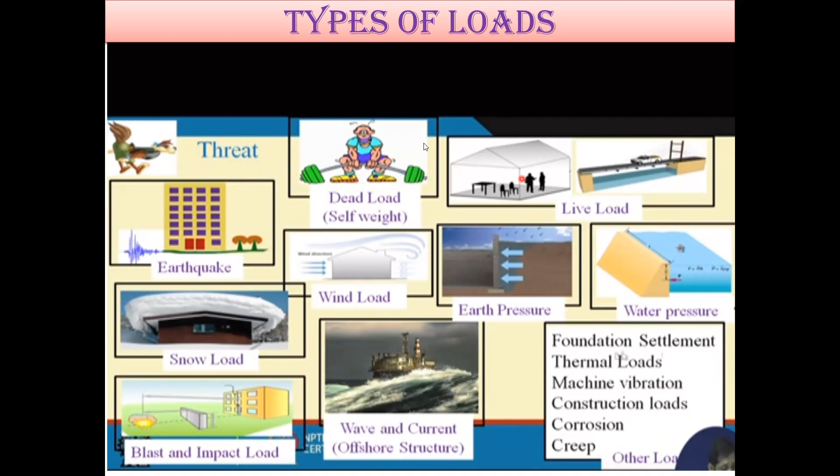So these are different kinds of load that act. One, we have a dead load, we have a live load, we have a wind load, we have earthquake load, we have snow load, then we have blast or impact load, for offshore structures we have wave and current load, and then we have water pressure if you're constructing a dam and all. So right now we are constructing a small residential building, so we'll be considering only the dead load and the live load.

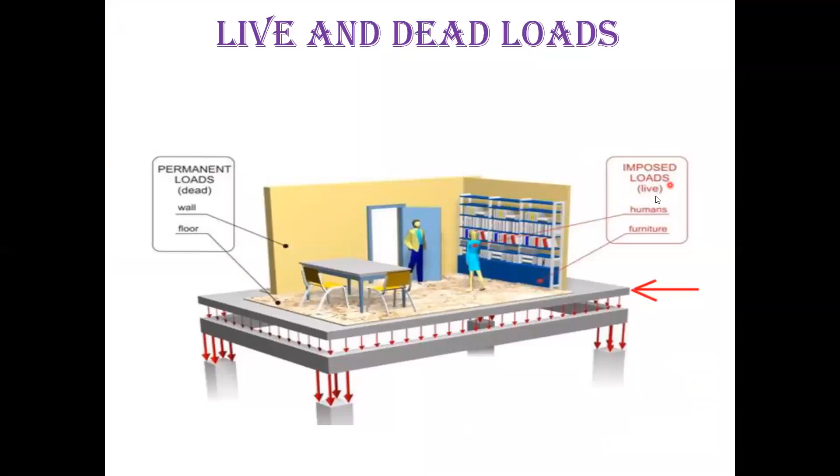So we human beings are called live load. Live loads are also called imposed loads. And the wall, the beam, the slab, they are all called dead load because they're permanent. They're not going to move here and there, right? The wall, the floor and all. But we human beings, the furniture, we are all live load. So that is why we call ourselves an imposed load, right? So with this understanding, I'll try to move ahead.

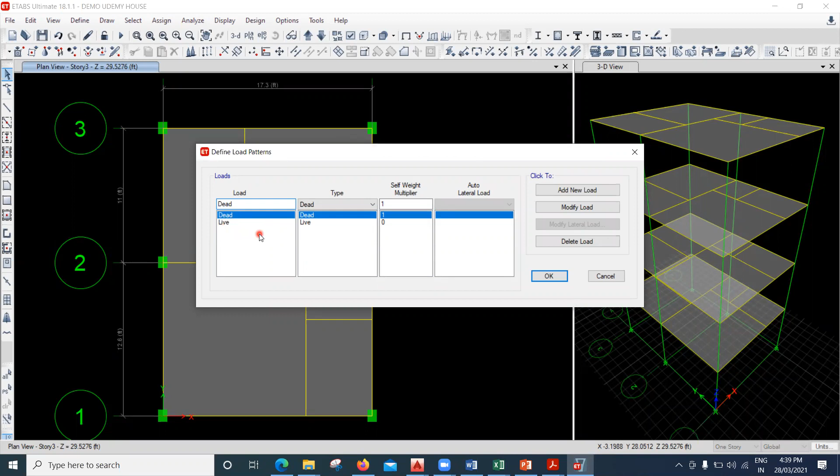Now, how do we calculate the load? Whenever we want to calculate the load, first we need to define the load. So I'll go to the option called define, and there's an option called load patterns. By default, ETABS is going to consider two loads, that is dead load and live load. That is enough for us. But actually, let us say this is a slab I have. Over the slab, I'm going to put my tiles and all, right? I'll show the image for that.

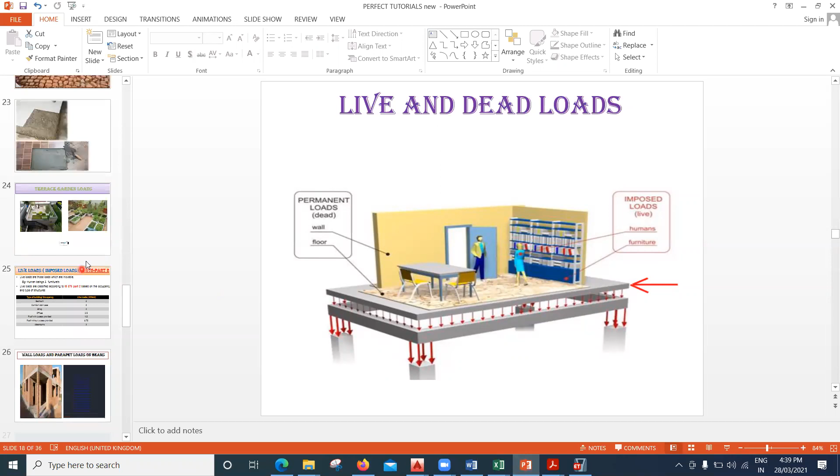Yeah, you can see it here. This is a floor I have. Over the floor, I'm going to put the cement mortar, and over that I'm going to lay the tiles. So this will also add weight on my floor, right? So this load I'm going to apply is called SIDL load, that is superimposed dead load. Over the floor you are applying this load, that is called superimposed dead load. So we need to calculate how much load is coming. I'll tell you how to calculate that load.

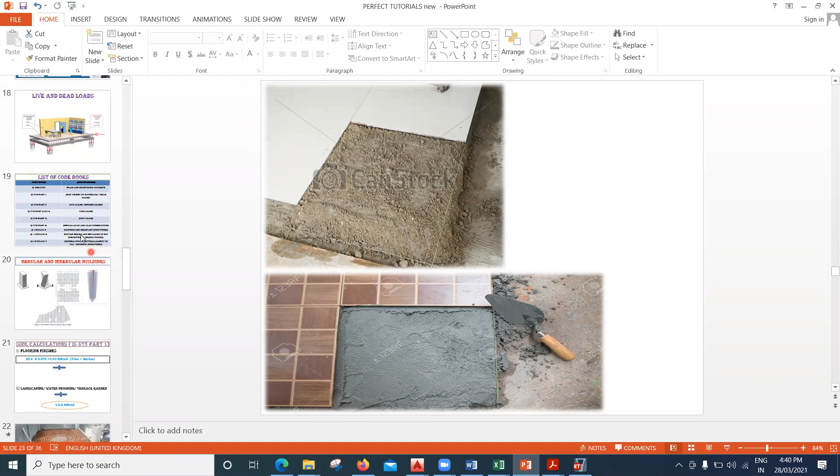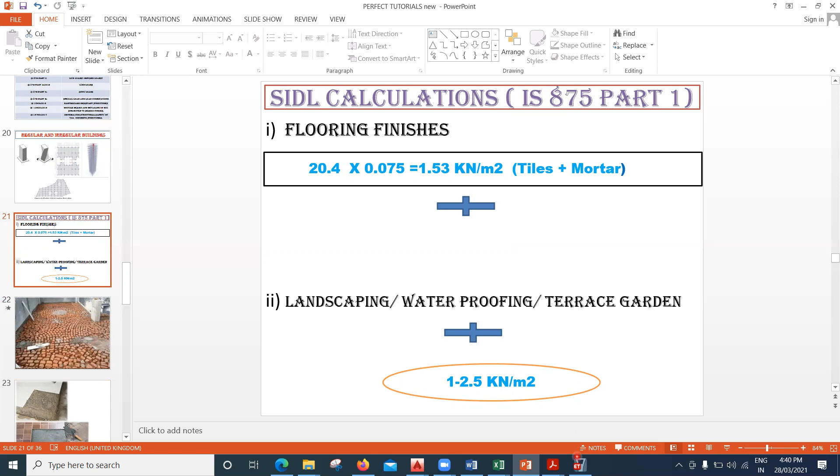So first I'll create that pattern. Let me write this as SIDL, that is superimposed dead load, and in the type I'll say this is my super dead. Okay, and then I'll say add new load. So the load pattern has been created. One is dead load, the second is live, the third is SIDL, and click on OK.

And now select the slabs where you want to put that load. I'll click on all stories. I'll select this slab, this slab, this slab, this slab, and this slab. Then I'll go to the option called assign, then shell load, then uniform.

So what I need to do, I'll go to units. I'll put it back to metric SI defaults. Okay, I selected the slabs again. I'll go to assign, and I'll go to shell loads. I'll go to uniform, and here under the SIDL, let me put that load as 1.53, what I've calculated, right? This is 1.53 what I'm getting, and I'll say apply.

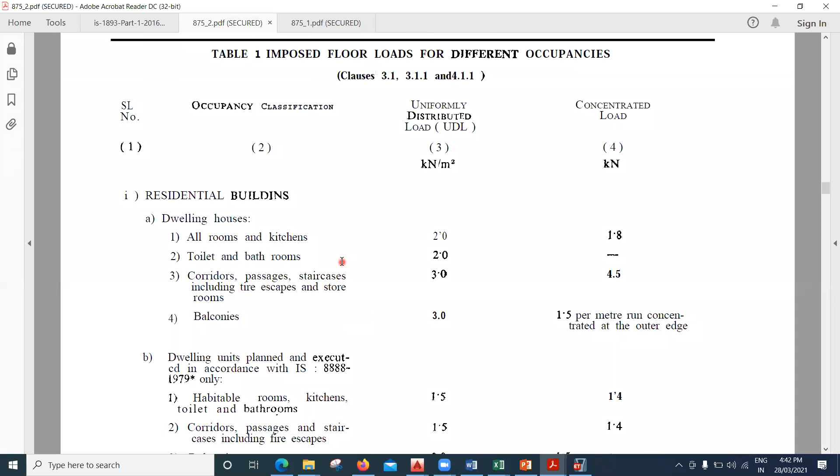Now, let us say we are doing a residential building, right? So in the residential building, for all the rooms and the kitchen, you have to consider your live load to be 2 kilonewton per square meter. If you have a toilet and a bathroom, there also you have to consider 2 kilonewton per square meter as a live load. Now if you have balconies, then you have to consider it to be 3 kilonewton per square meter. If you have a corridor, passages and a staircase, you can consider the live load to be 3 kilonewton per square meter. So this is for a residential building.

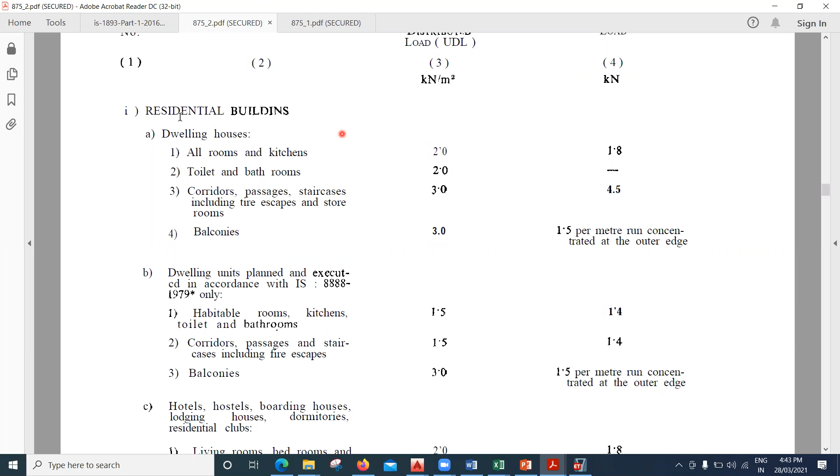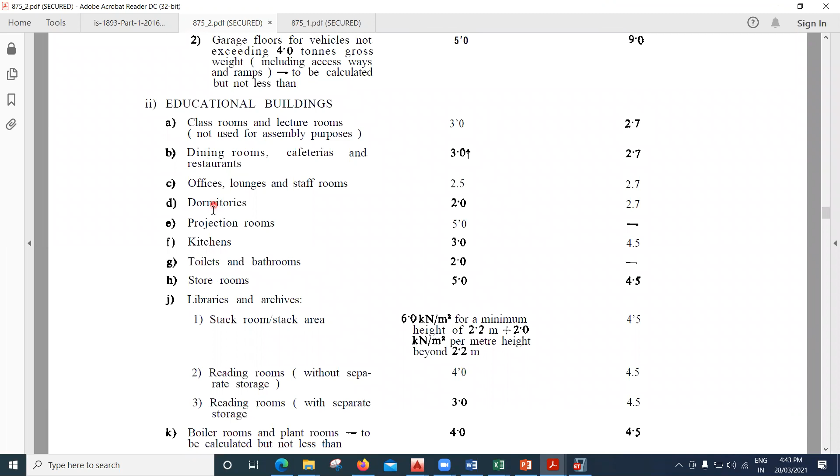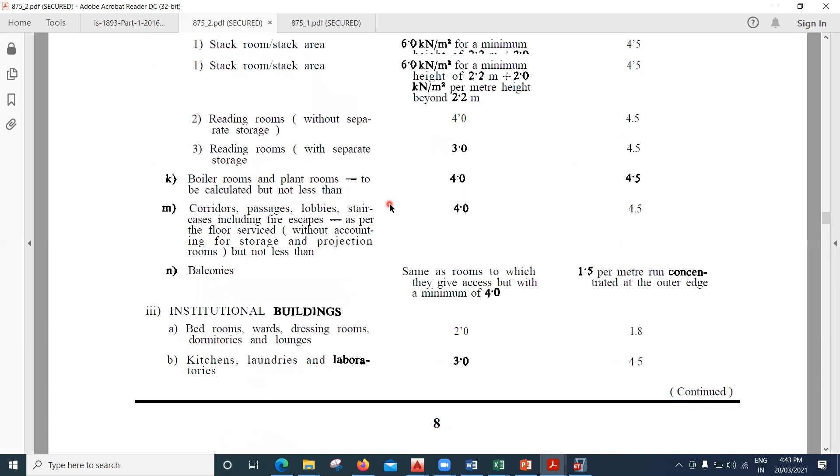In the same way, if you're doing some other project, let us say an educational building, in that case for the classrooms, you have to take 3 kilonewton. If you have dormitories, you have to take 2 kilonewton. Similarly, if you're doing an institutional building, based on the type of the building, the different load has been given in this particular code book. Right now, we'll not try to get into all that. We'll just consider the building what we are doing.

It's a residential building, a small house, and we have rooms. There we need to take 2 kilonewton, and wherever we have toilet and bathroom, there also we need to take 2 kilonewton per square meter. That means in the entire structure, we have to take 2 kilonewton per square meter of live load.

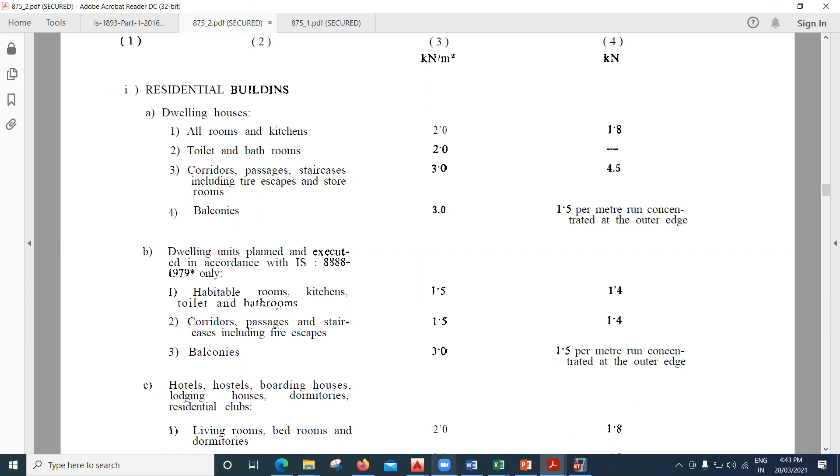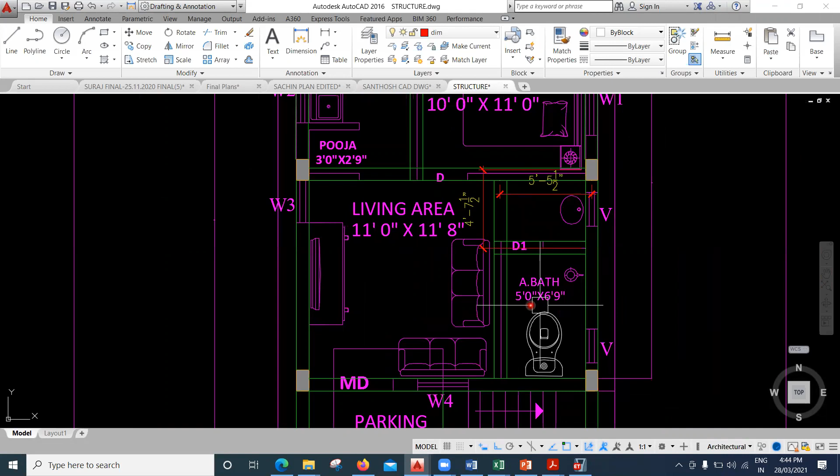So if I want to show the AutoCAD planning, I'll go to the AutoCAD, and if you try to see into this, this is a kitchen what I have. On this slab I need to put 2 kilonewton per square meter. I have a bedroom, here also I need to put 2, and I have a living room, here also it will be 2. Again I have a bathroom and a wash basin here. That means here also I need to put 2 kilonewton per square meter. So throughout all the slabs I need to put 2 kilonewton.

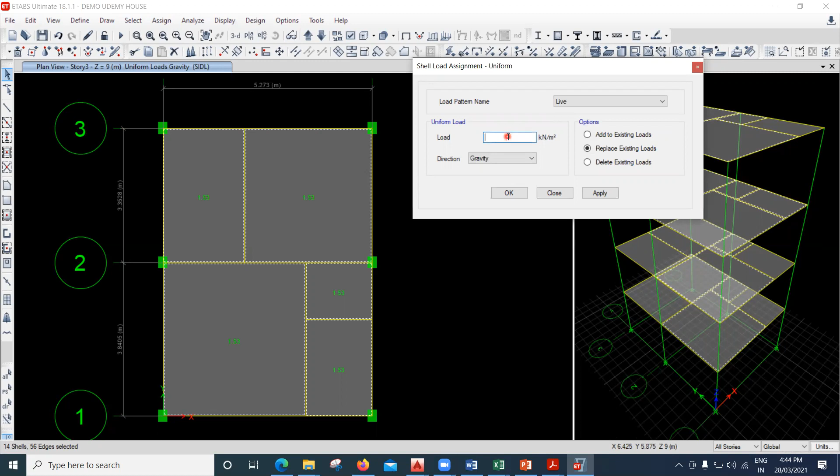So what I'm going to do, again I'll select the slabs, all stories, select all the slabs, right? All the slabs have been selected. Go to assign, then go to shell load, go to uniform, and this time select the option as live load. And now instead of 1.53, we have found the live load to be 2 kilonewton. I'll select 2 and I'll say apply. Now can you see that 2 kilonewton of load has been applied?

Now just in order to see what load is applied where, there's an option here called display shell load assigns. If I click on that, and say I want to see the SIDL, click on SIDL and say apply. So we had applied 1.53, you can see the same load here. Now if you change it from SIDL to live load, click on live load and say apply. What was the live load you had applied?

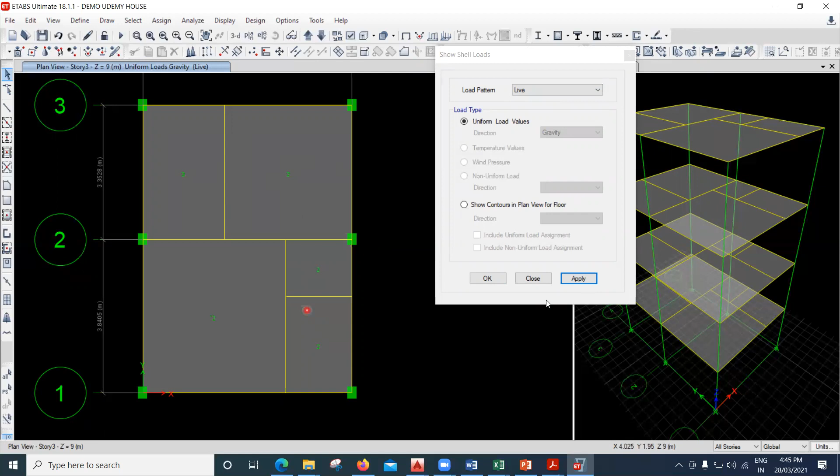2 kilonewton per square meter. Again, you are able to see all these things, right? So in this way you have to apply the load on your floors.

Now coming to the wall, right? So wherever we have beam, there I'm going to consider the wall load. So I need to calculate the wall load. Now for wall load calculation, the simple trick is that we know the unit weight of my bricks. The unit weight of my bricks is 20 kilonewton per cubic meter, right? And the thickness of my wall is 230, which comes out to be 0.23, right?

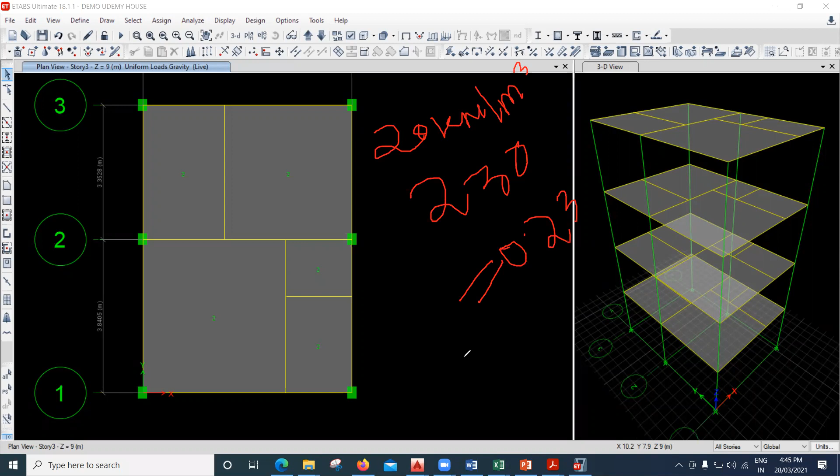So what I'm going to do, I'll multiply this. 0.23 is the thickness of my wall, multiplied by the density of the brick, which is 20, into till what height you are going to construct this brickwork. Usually the floor to floor height will be 3 meter. So up to 3 meter I'll consider the brickwork. I'll multiply this by 3 meter. Suppose your floor to floor height is, let us say, 2.5 meter, in that case you have to multiply this by 2.5 meter, right?

I'm not going in depth. I'm just trying to cover a basic thing. There is a lot of calculation here, but as of now, for our understanding, just understand the floor to floor height and try to calculate this. So 0.23 into 20 into 3 is what I'm doing. So I'm getting 13.8. This 13.8 kilonewton per meter is the load that is coming on all the beams due to the wall.

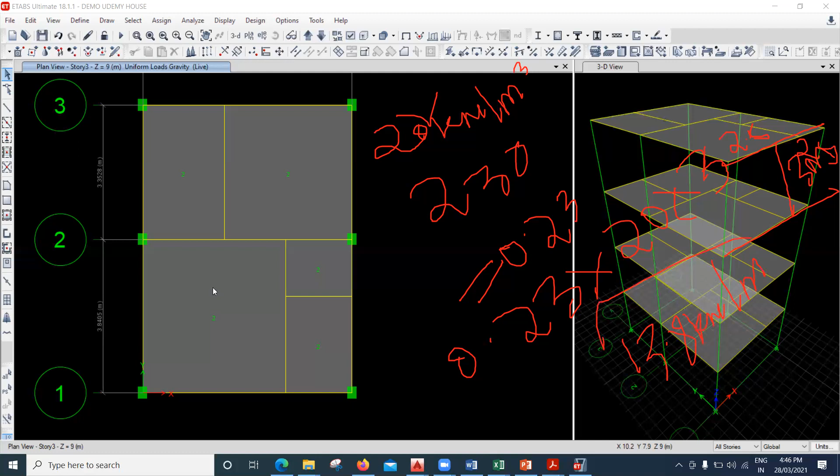So now I'll select all the beams here. I'll select this beam, this beam, this beam, and this beam, right? But in the terrace portion, I'll be putting a parapet. I'll show you how it looks. See,

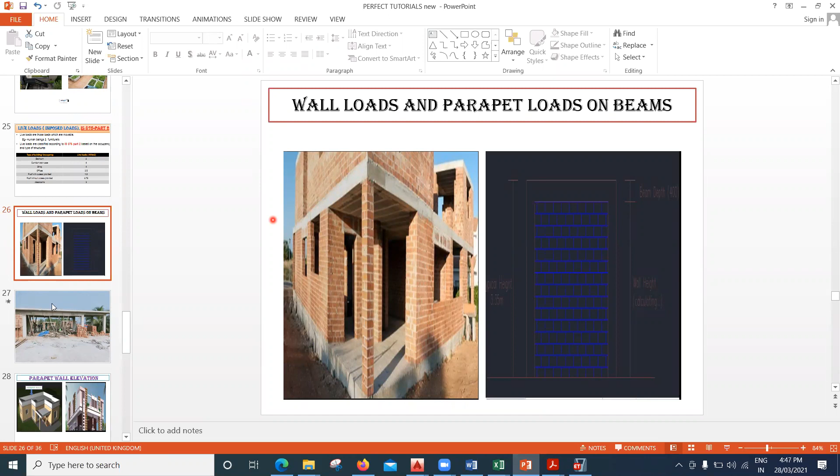this is the brickwork load what we have calculated. You can see this wall. On this wall we have done this brickwork, that is the load I'm calculating. But if you go to the terrace portion, in the terrace we are putting this parapet, and the height of this parapet is just 1 meter. So the load coming on that terrace portion is very less, so you don't have to calculate the entire length. I'll be explaining how to do that calculation.

So I've selected all the beams, but I'll go to the terrace floor, story 4. In story 4 I'll make this as one story, because I don't want my beams to be selected here. I made it as one story, so only the change will happen in story 4. I'll unselect all these things. So you can see here, only in story 3, story 2, and story 1 all my beams are selected, and in terrace it is not selected.

I'll go to the option called assign. This time I'll go to frame loads, and I'll go to distributed. And here, instead of dead load, I'll consider this to be SIDL, superimposed dead load. Don't look into all these things, directly come here. What is the load we calculated? It was 13.8 kilonewton, right? I'll enter 13.8 here and I'll say apply.

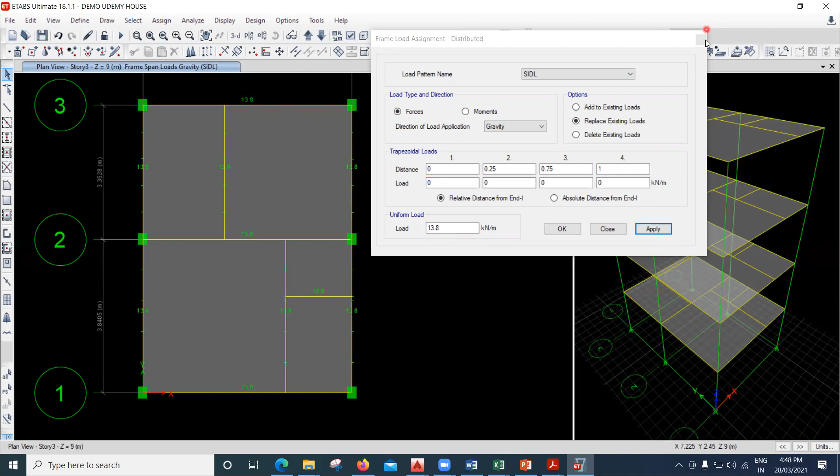Now can you see on all the beams the wall load has been assigned, right? Now coming to the terrace portion, that is the top. Story 4 is the terrace portion. Here I have to add my parapet wall load. The parapet wall load you have to calculate in this way. Let us say the height of my parapet is 1.2 meter.

Okay, the height of parapet is 1.2 meter, and let us say the thickness of that parapet wall is 100 mm, which comes out to be 0.1 meter. And let us say it is made up of brickwork and the unit weight of brick is 20. Now try to multiply this, that is 1.2 into 0.1 into 20. If you do that, you are going to get 2.4 kilonewton per meter. So this 2.4 kilonewton per meter is the load that is applied on this beam.

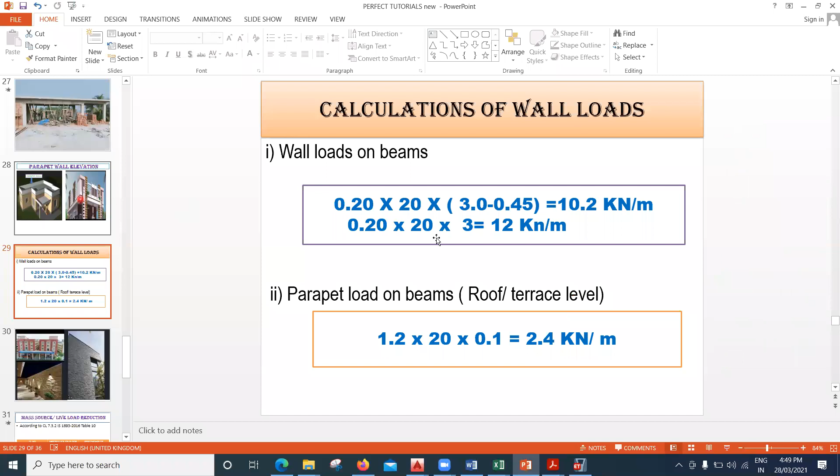You can see a beam here, and this is a parapet wall. So this load is applied on this particular beam. So what I'm going to do, I'll go to the story 4. I'll select only the outer beams, because only on the outer beams your parapet load will be acting. These inner beams are not subjected to anything, right? I'll select only the periphery, that is the outer beams. I've selected all the outer beams.

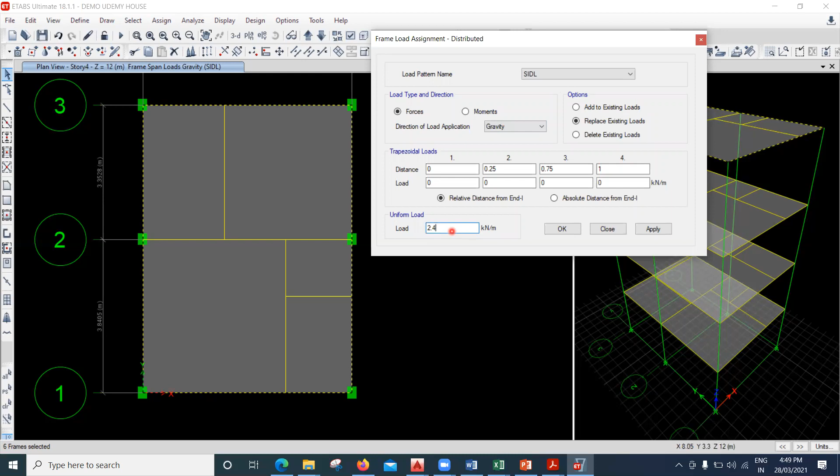I'll go to assign, I'll go to frame load, I'll go to distributed, and now again under SIDL, let me take that load as 2.4, select on 2.4 and say apply. So can you see only on the outer side that load of 2.4 has been assigned. That's it. We have put our dead load, we have put the live load, and the wall load is also applied on all my beams.

Yeah. Now the last thing that we need to do is, if you come to the base, we have to give the foundation, right? So this is my foundation. You have to give a support to that. So what I'm gonna do, I'll come to the foundation and I'll select one story. I'll select all my joints in this way. Try to select the joints. So I'll keep my cursor here and try to drag it.

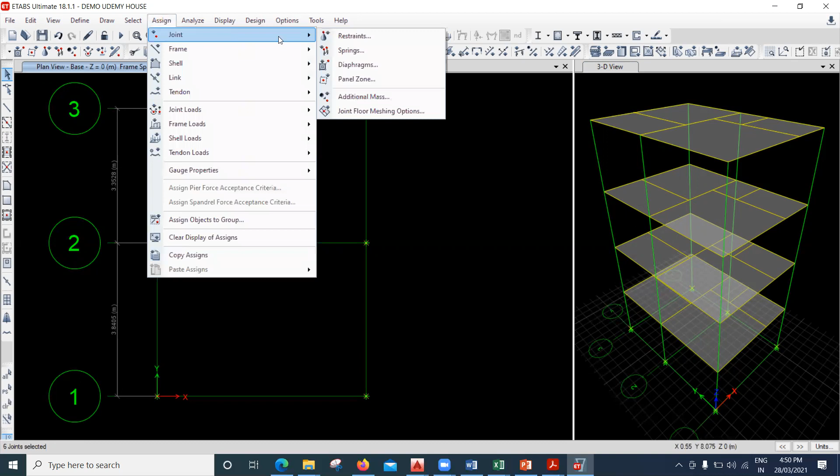So you have 6 columns, right? So only 6 joints will be selected. You can see it here. 1, 2, 3, 4, 5, 6. You can see 6 joints are selected here. Then I'll go to assign, and assign this option called joint, and there's something called restraints. So now I'll make all my base as fixed support, right? So what I'm going to do, this option called fixed here, click on that, and I'll say apply.

The moment I say apply, everywhere the fixed support will happen. Then your building will not move in X direction, Y direction, as well as it will not try to rotate. So I made all my base as fixed support, right? So in this way you have to give the support to all the joints, whatever joints you have in the base, this is how you have to do.

Similarly, if you want to give it as a pin support, you should have gone to assign, joint, and restraints. Here, this is a fixed support, this is a pin support, and this is a roller support. So practically, pin support we try to do in steel structure. In the RCC structure, always we go with a fixed support unless there is a need for the pin support. This roller we don't use unless we do some manual problems.

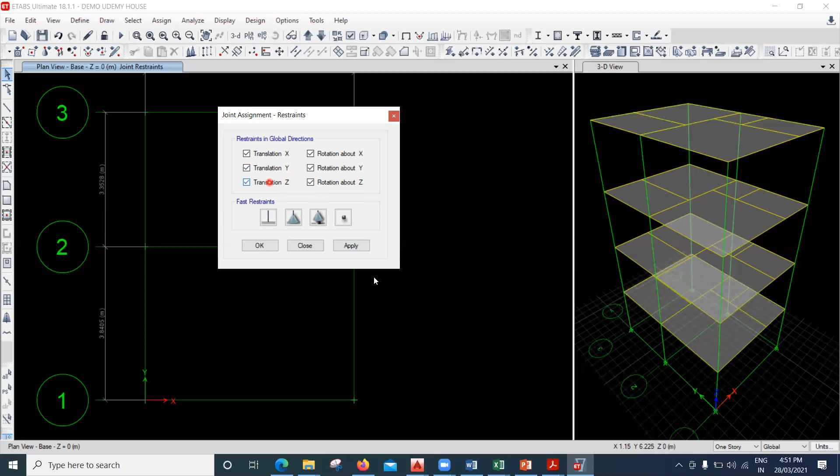That's it. And this is none. If you don't want to assign any support, you can click on this and you can say apply. No supports will be assigned. As of now I require fixed support, so assign this everything here, right? And these are the translation in X direction and translation in Y direction, that is the 6 degrees of freedom. This is what you mean by translation X, Y, and Z. So I'll close this thing. So I assigned the support, right?

That's it. Next is that we have to define the load combinations, and then we have to run the model. So in the next lecture, we'll try to see how to prepare the load combinations and how to run the analysis for this particular building. I hope this is understood up to here.